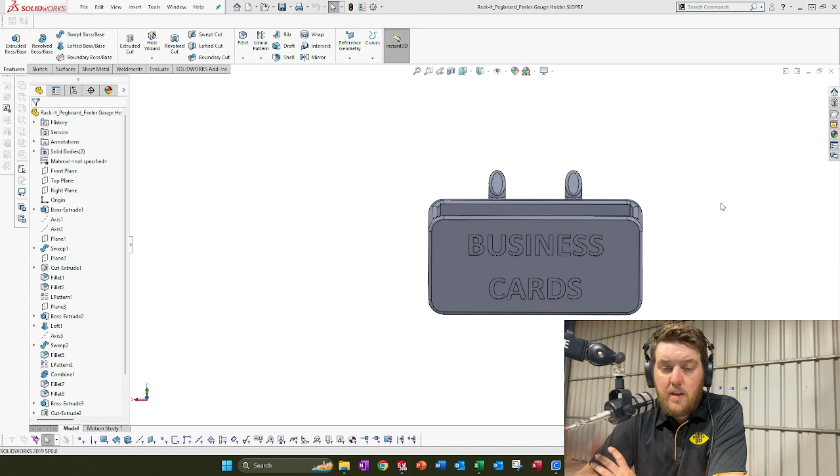And this is what we're going to look at doing tonight. This is one of the parts, designed for a scraper - I haven't got the scraper on me - but for a scraper to drop in here, and it's just got the hooks on the back. It's a pretty rough print. When I'm prototyping, I just try to print it quick and I don't clean it up much. Once it works and I'm happy that I'm going to use it, I'll print a finer copy of it. So that's what it looks like.

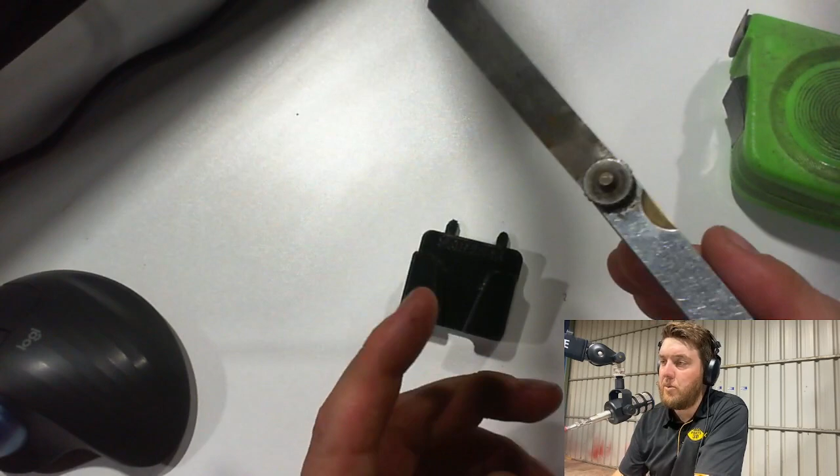And so I use a feeler gauge. Now, if you do use 3D printers, you'll know what this is for. People use paper sometimes to set their nozzle height, but I have found this 0.075 millimeter feeler gauge is perfect for 0.2, 0.4 and 0.6 mil nozzles, and that's worked really well. And of course it's firmer than paper, it won't tear, gives you a real firm contact with the nozzle and the bed. So yeah, I'd get some of those off eBay if I were you.

But I'm going to design one of these with a pocket to suit the feeler gauge so I can just go to it, grab it - it's on the board ready to go - rather than putting it in the shelf in a little drawer where it is now. I've got to keep fishing around to find it.

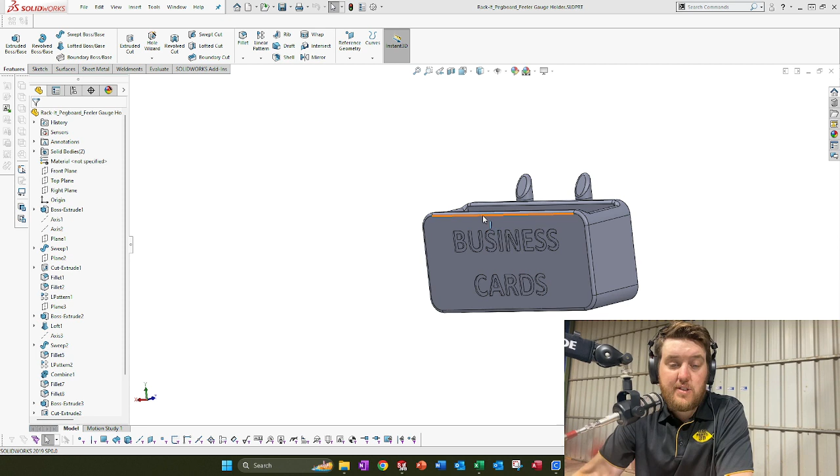Alright, so let's go to SolidWorks. This is my design software, and this is another one I've designed for my business cards, just to be held there, and if people come in I can give them one.

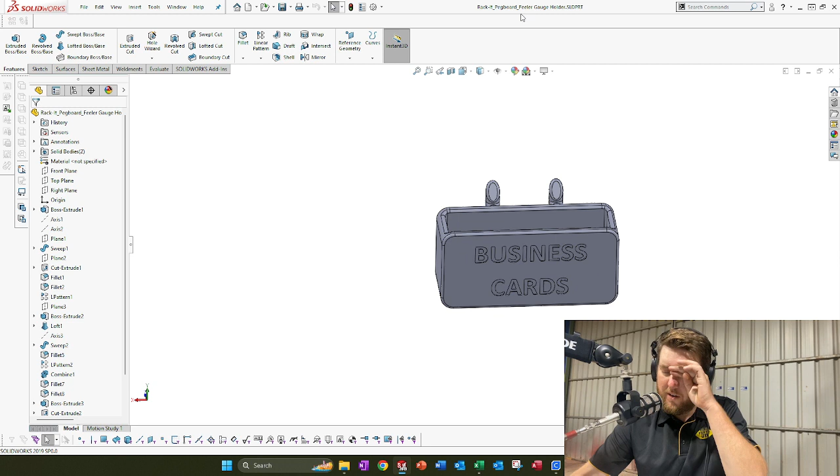So we'll use this. I've already saved a copy called feeler gauge holder. Now that's really important - if you're ever designing something, I encourage you, before you start designing, save a copy of the part you're doing, especially if you're copying over another part. I've sometimes gone up to an hour of drafting and either copied over another folder or lost it if the program crashes and I hadn't saved it.

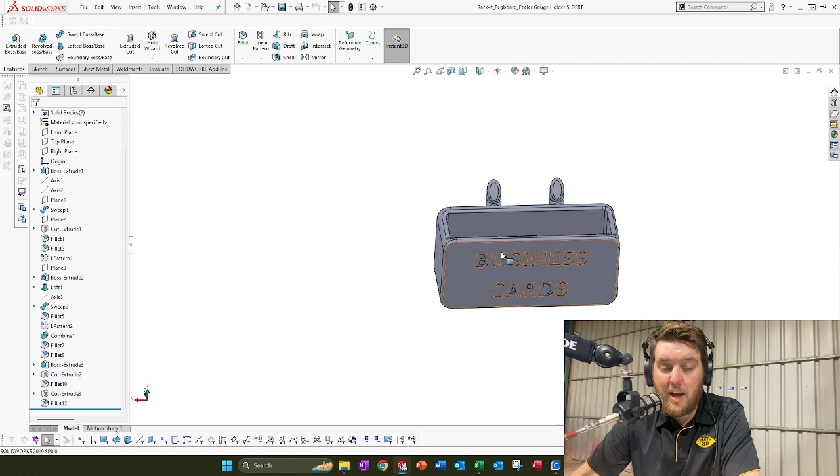Always start by saving it, and save regularly as you go. We're going to modify this. I'm not going to go too far, but this is not a ground-level-up tutorial on SolidWorks. It's just a rough idea of how I get a part designed, get measurements off the part, etc. I'm just taking the measurements already used for this business card holder and adjusting them.

Because in essence it's going to be the same thing - a pushed out section, a boxed out section with a pocket in it, which will suit the feeler gauge. So I'm not going to draw it from scratch. That's a good way when designing stuff, to have templates of parts saved, which takes away the time of ground level drafting.

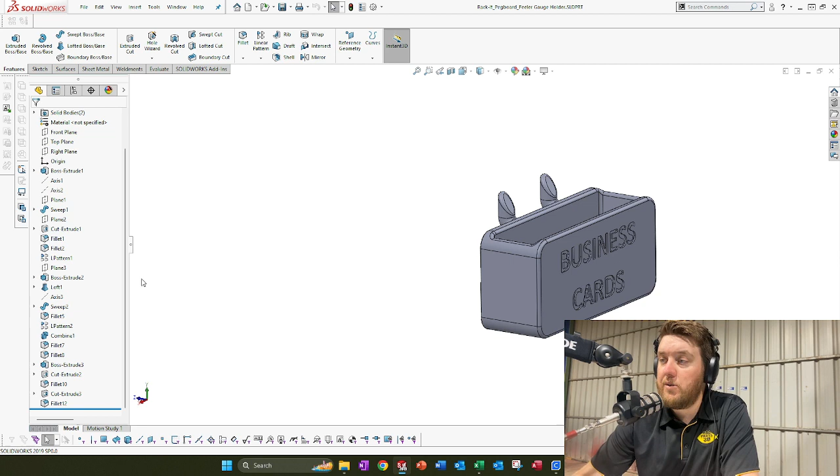But very quickly, if I scroll right back to the start, the first thing I did was draft the pegboard itself, to scale, every detail checked to make sure it's exactly right. That gives you a good foundation, as all the parts I draft are onto this template now. I won't go into too much detail on what I did there.

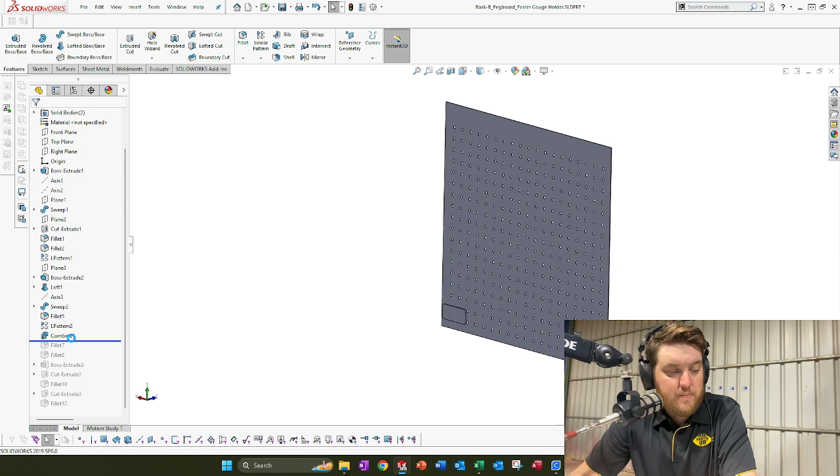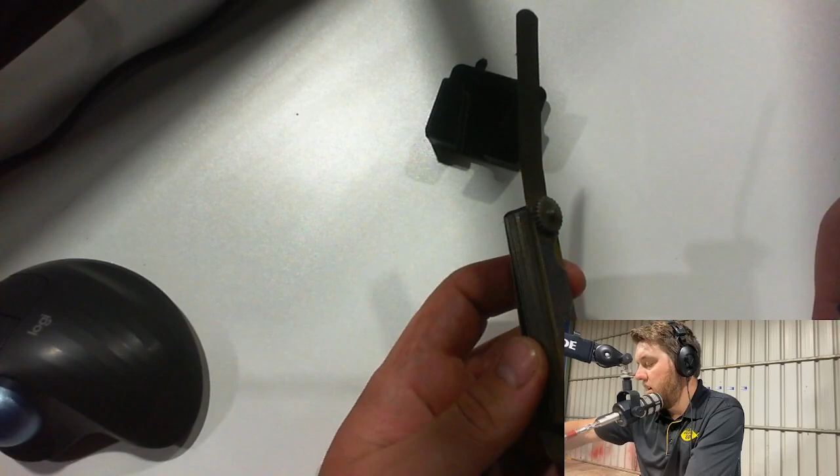Alright, that's where I want to be here. This is the backing plate template, so I've got to get this right. If we go back over to our part - it's not very wide, only 12 mil wide in terms of width, and I think it's going to suit this backing plate size anyway.

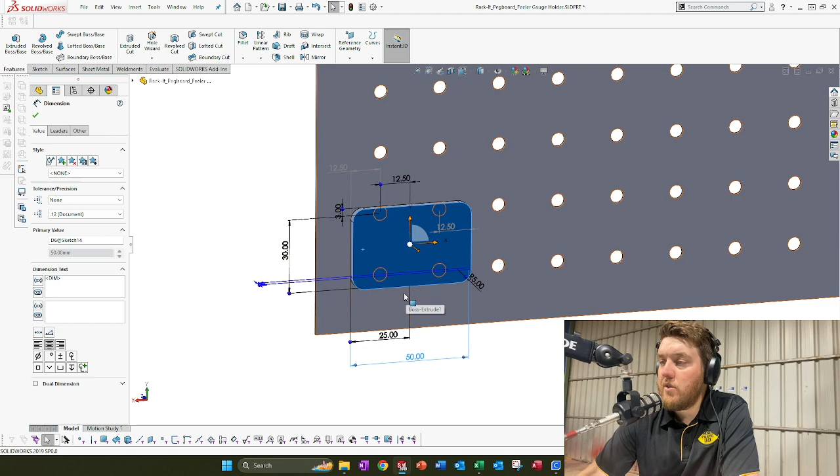So we'll copy that, the scraper one, which is 50 millimeters. Back to SolidWorks - this is 35, I'll do it off the center here. All I have to do is adjust this measurement to 25, and it'll make the overall width 50 millimeters, which we got there. That's good. And the height, I've got 30 mil there.

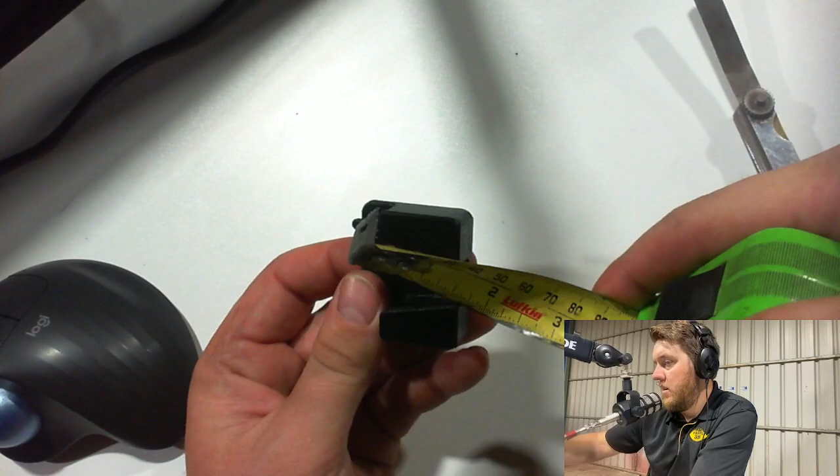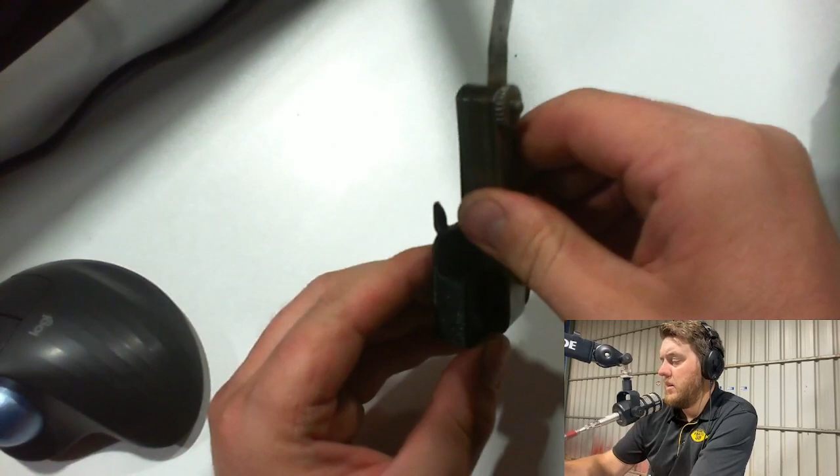I'm just going to check this scraper one. What's this scraper height? Because this height seems good. Yeah, it's a bit higher - can't really see that, 40 millimeters. Usually I'd have verniers, but they're in my truck. 40 mil. So I think it needs to be 30 mil, because this is quite high and quite heavy.

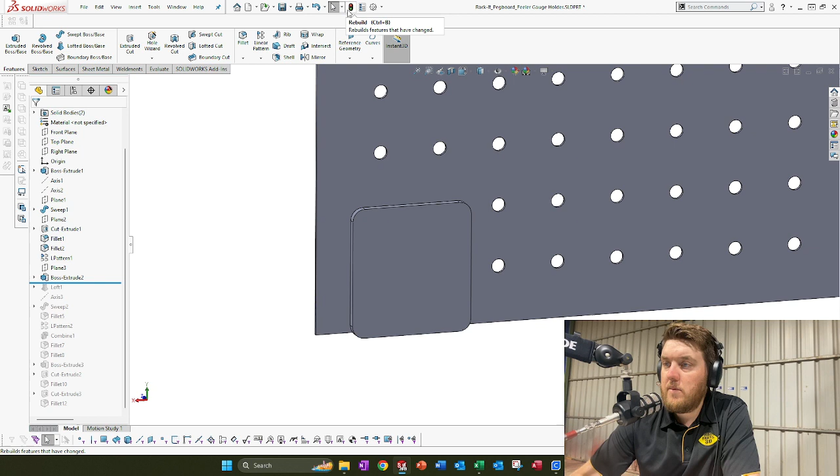You know what, I could probably go a bit deeper. Yep, I'll go even deeper again. I'm going to go 50 mil deep on the overall height of the backing plate so it supports it and doesn't fall out or anything. So we'll go back across and change this vertical height to 50 mil, and we'll just press rebuild. Yeah, that looks good. Alright, now we'll go down.

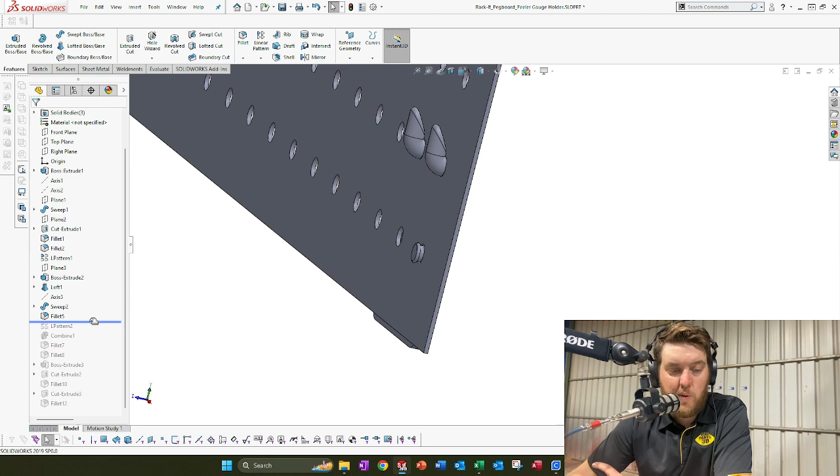The next step, this is called rolling back. So all these features under here are already designed, but I've just rolled them back to edit the features behind them. As I roll it forward, each of those features will jump in. This is where I designed the hooks and the little plugs in the bottom.

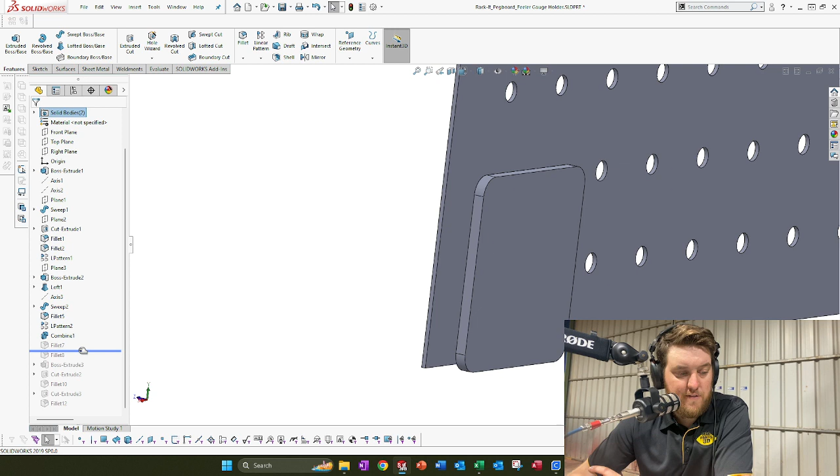I won't go into detail about them, it's my special secret. It took me hours to get the size of these little plugs just right so they'd push through the hole without breaking, but still provide pressure and hold the thing in place firmly when it's there. But anyway, let's keep moving.

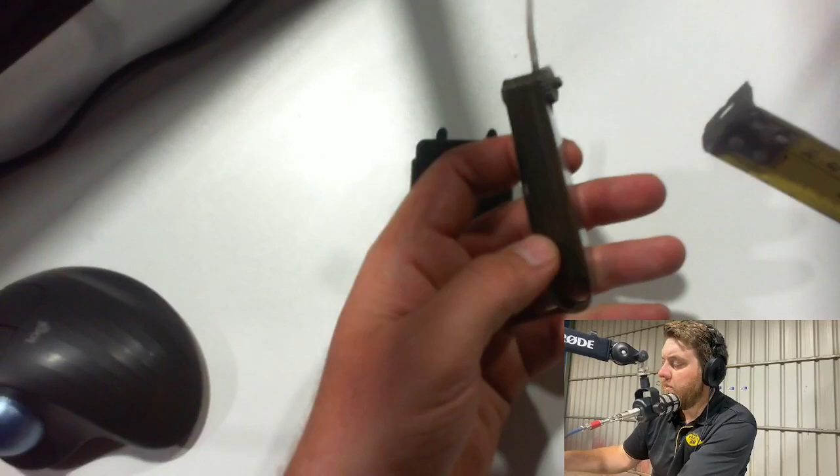Cool, so that's a combine - I combined all those parts together, and now with a few fillets put on, we're ready to start building off the backing plate. Alright, we need a depth. At the moment I've got 20 mil deep - I've taken that face and brought it out 20 mil for my business cards, but let's have a look what I need for this feeler gauge.

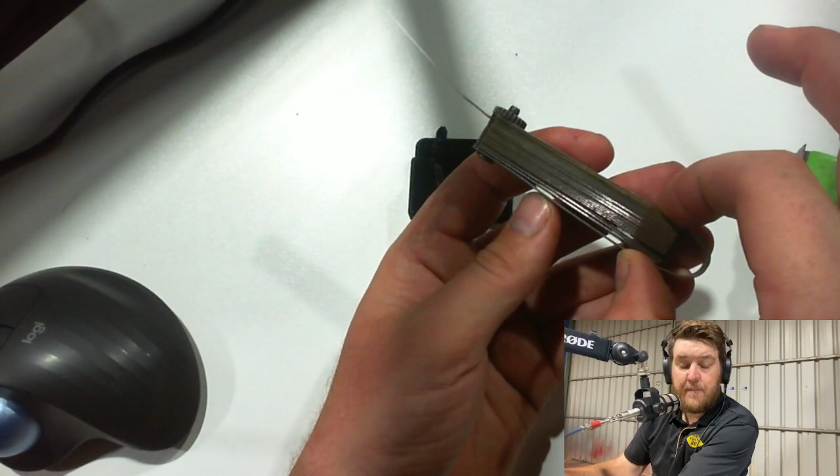The feeler gauge is about 20 mil, that pushes in, but I don't want it to be too tight - I want it to be loose. So 20 mil looks good for the pocket depth, and then you need to add how much thickness of material you want in front to retain it, which I think 3 mil will be fine. And I encourage you, if you are designing parts to be 3D printed, try and do your design, get it working, and then think.

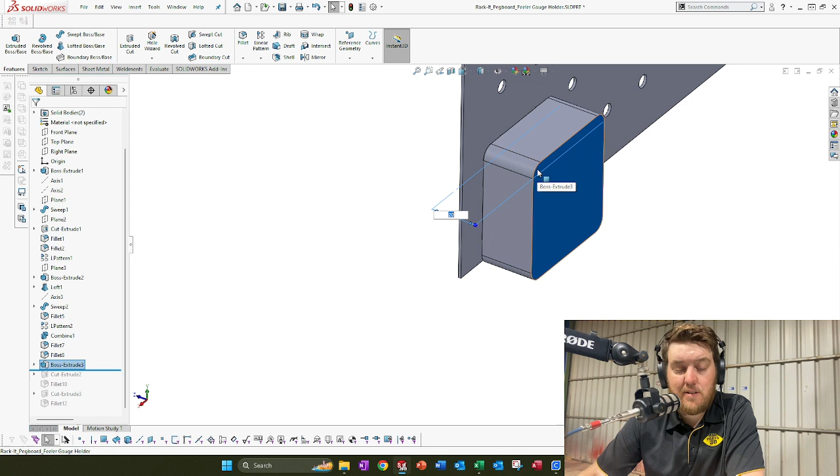I learned this from Elon Musk. I think he calls it delete, delete, delete. Try to remove as much material as you don't need. You don't want it to be weak. You still want it to be strong and useful, but you only want to use the material you need, because every bit of material you lay in costs money.

So I'm going to make it 20, which is for the depth of the feeler gauge, plus 3. And that's a good thing about SolidWorks as well, you can just put in your formulas, 20 plus 3. If you've got stuff that's a bit more complicated than that, obviously. 23 mil deep. Now we're going to roll back the next feature, which is the pocket.

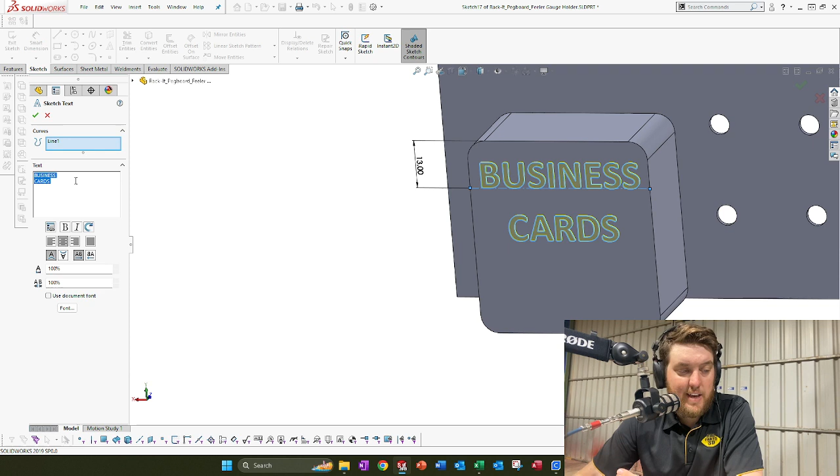Oh no, the text on the front. All right, we've got to edit that. So we right click, edit that sketch, double click on the text, and we'll put in feeler, enter, gauge, tick, and we'll just see what it looks like.

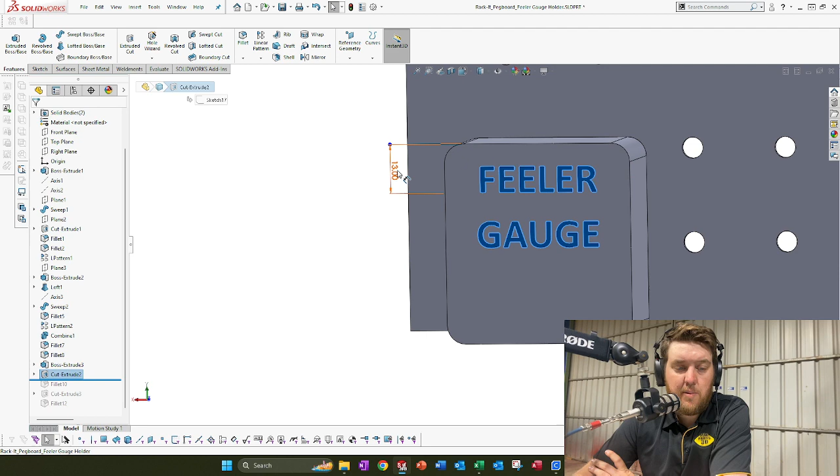And it's a bit high, so I'll just have to go into the sketch. I can preview it, and I've got 13 mil, excuse me, which is to the top line where the text starts on. So I'm going to bring that down, probably another 10 mil, 23. Yeah, that looks better. You could take the time and get it precise, but that looks good enough for me. All right, so that's good.

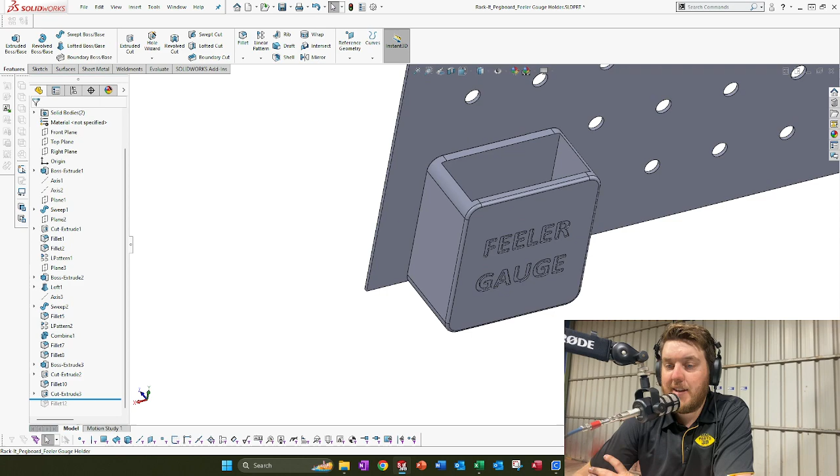Let's roll back the next feature, a fillet. Oh yep, just a fillet on the front. We'll leave that the same. Next feature, the pocket. All right.

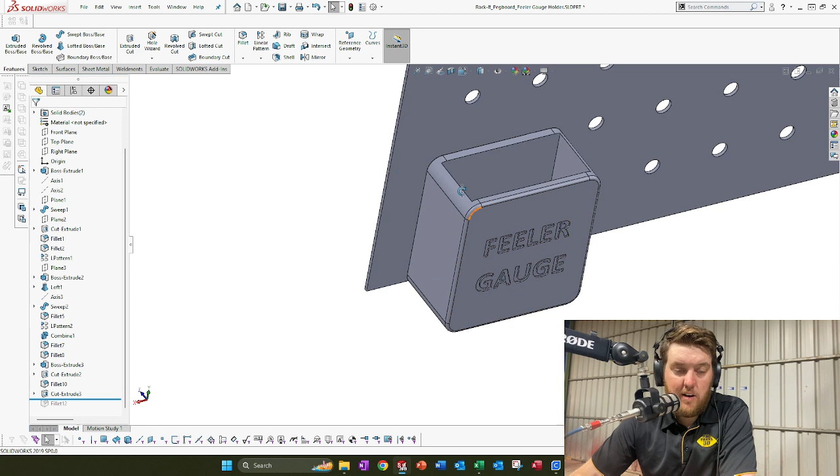Now that's too wide. We'll go back to our feeler gauge and figure out the width of the pocket that we need to machine, which is this dimension here. And that's right, it's 13 mil. It looks like it's about, my tape is old, next time I'll get verniers. It looks like 13 mil, so I'll make it, I don't want it too sloppy, I'll make it 16. Give 3 mil clearance in there just to be safe.

So we'll come back across. Again, I like that in SolidWorks you can just click on the feature in the design area and it brings up dimensions which you can edit, or of course you can right click on the feature tree, edit sketch, and then you get your sketch there.

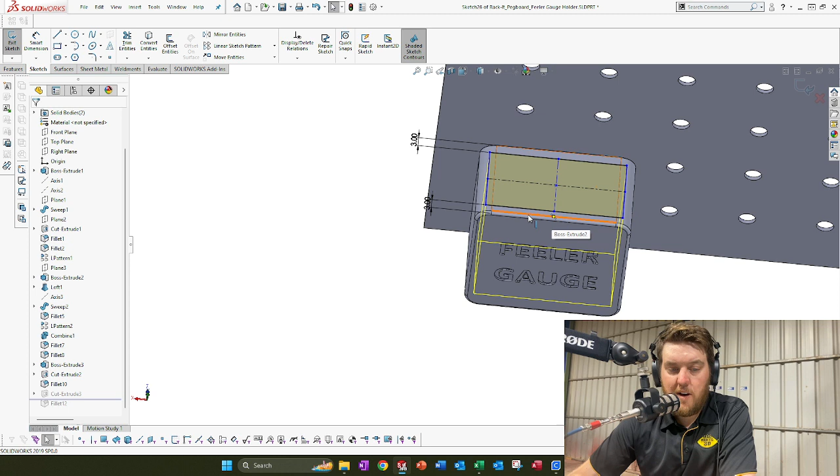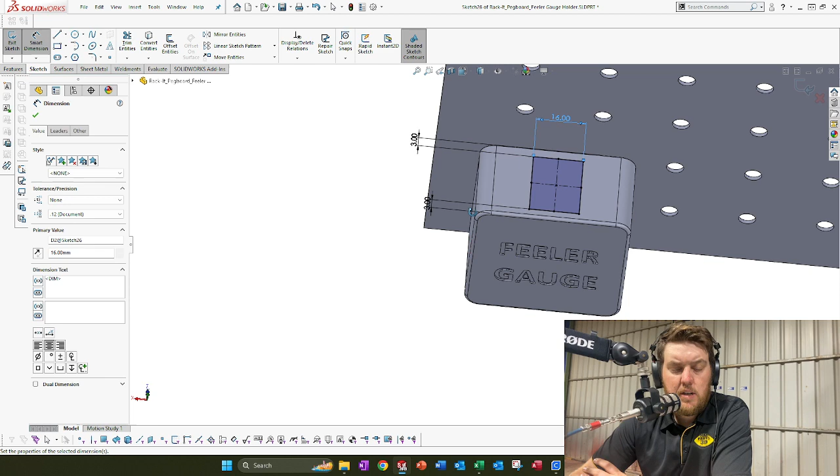So I'm going to not go off the edges this time, delete those measurements, delete, delete. I'm going to right click on this line here, find the midpoint, and lock the center of my pocket cutout to that midpoint. Boom. And now when I dimension this width, it'll add or reduce it equally on both sides.

I can't even remember what, 16 mil, so I put that in there. 16 millimeters, bring it equally on both sides. 3 mil from the front and 3 mil from the back. I think that's right. Exit.

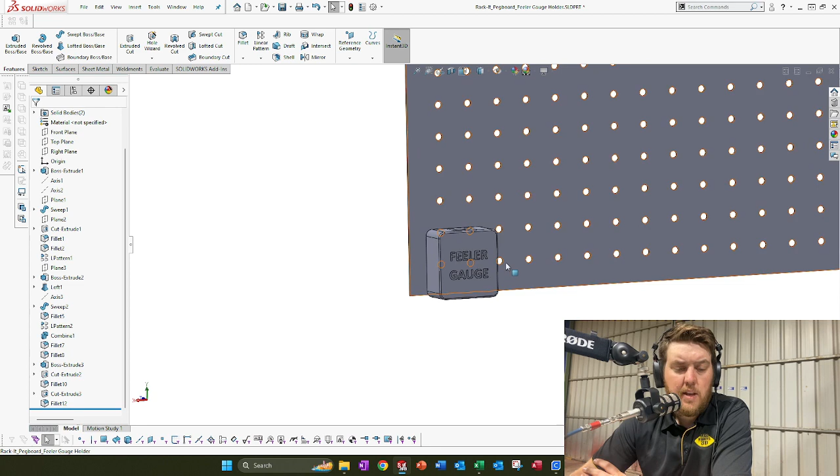That looks pretty good. I'll roll this next feature back, some fillets. Yep, and that's good. Fillets all the inside, I think 1 or 2 mil. And that's looking like it's pretty much ready to go.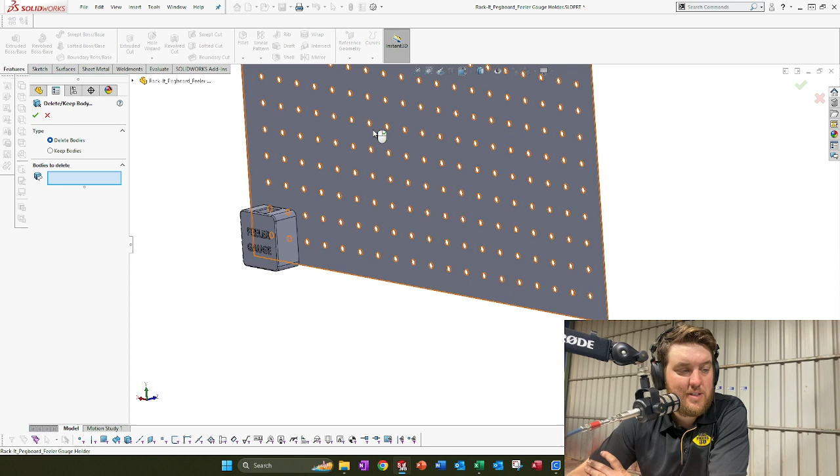Now what I do is I hide this, get rid of that because I don't want that to be 3D printed. I just want to be left here with the part that I'm going to be 3D printing. And what I might actually do, I know it probably doesn't come through, but I'm just going to delete that body. So insert feature, because I don't need that anymore. Delete body, bodies to delete, that one. Boom. And I'm just left with the part that I need.

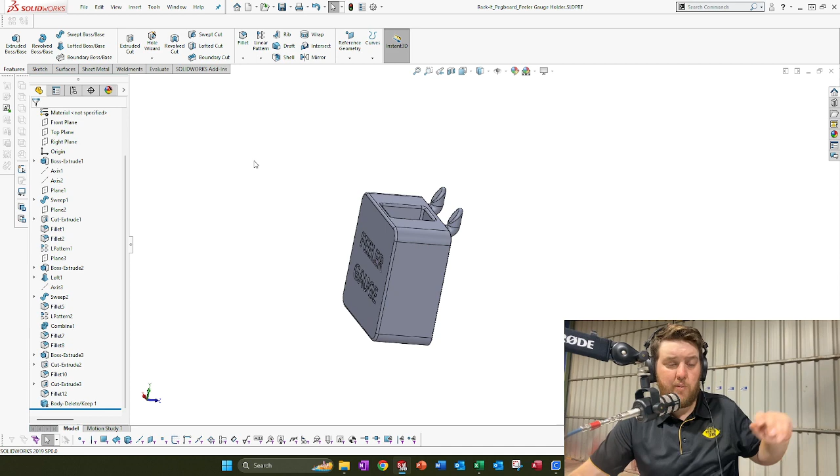Now it's probably, I could probably go a bit narrower if I wanted and right on these hooks, but just, I don't know, it looks good. The text fits on there nicely, so I'm going to keep it that width.

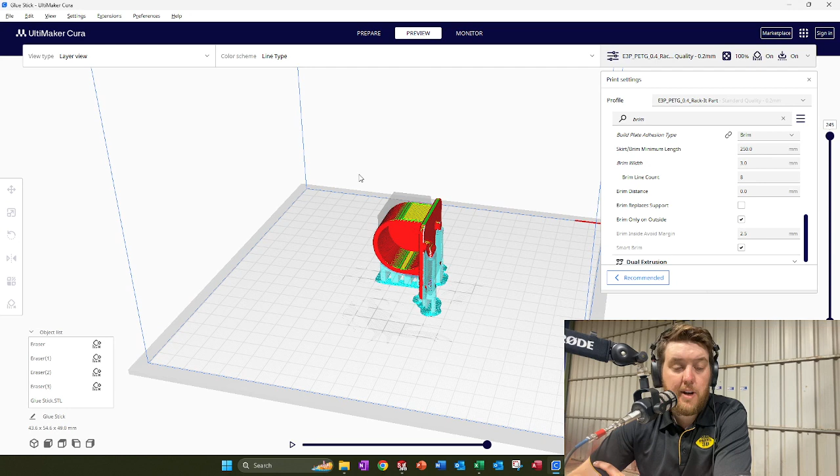All right, let's save it as an STL. So this at the moment is a SolidWorks part to be read in SolidWorks and some other programs, but it won't be read by the 3D printing software. So you go File, Save As, STL, which is what the 3D print software will read. Save. It'll ask me a question. Yes.

All right, for now I can close that down. I'll leave that. I'll open up, this is my slicer software.

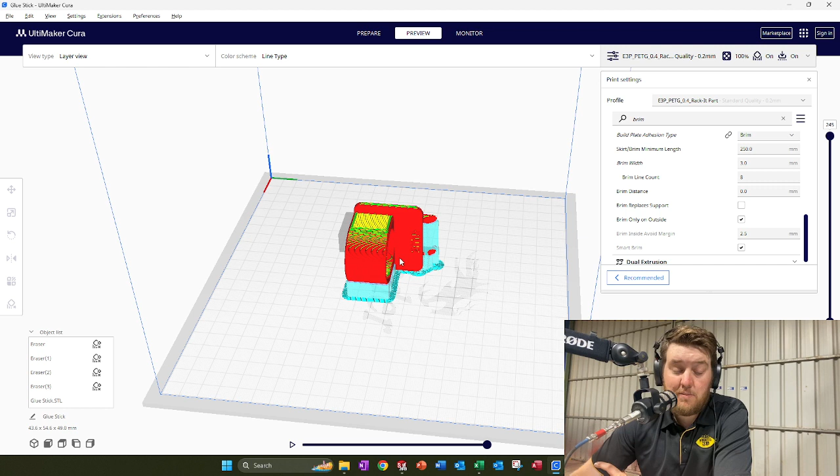There's plenty of tutorials about how to use the nitty-gritty of slicers on the web, so I'm not going to explain that. I just wanted to show you how to CAD. I'll hopefully show you in the future how to design more custom parts. I don't use a 3D scanner, I just use measuring tooling, and you can get pretty good results just with that.

All right, so we're going to clear the build plate. Go to prepare, open, find my part, which was in downloads for now. There it is, Rack-It feeler gauge. That's the one.

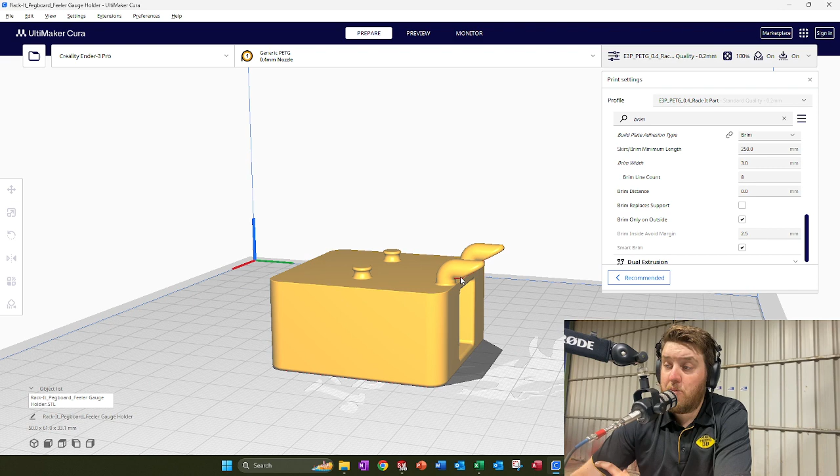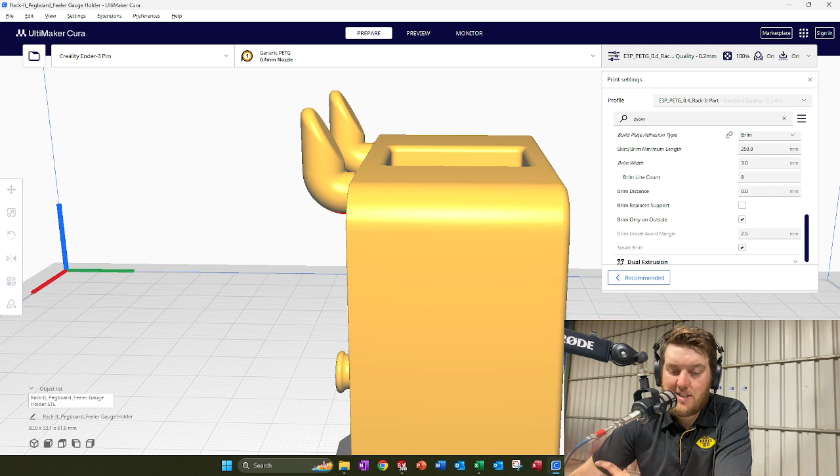Now, when I'm printing stuff like this, obviously the weak point is these little hooks. If you push them in and put a little bit of pressure on them, they're just going to snap off. If I printed it in this orientation, the layers would print in this direction. Let me do a slice and show you the preview. It's going to print in this direction, and at this point the layer's only going to go from there to there. It's going to be very weak and most likely snap off very easily. So if you come down, that's where it's going to be printing a layer like that, and that'll snap off a piece of cake.

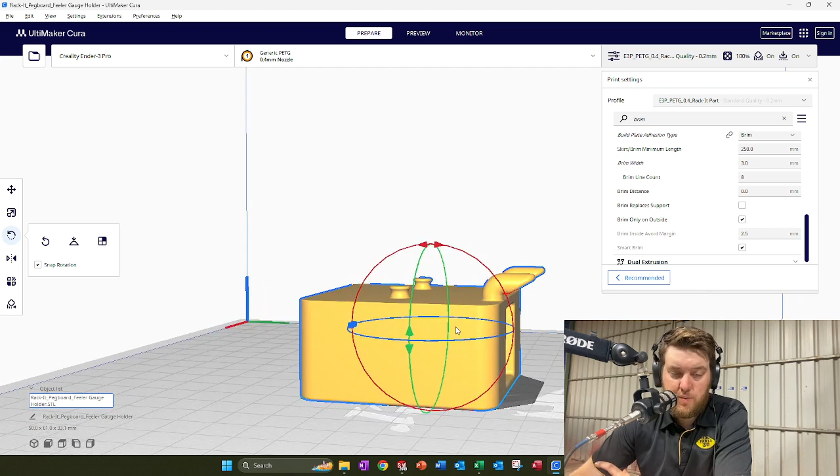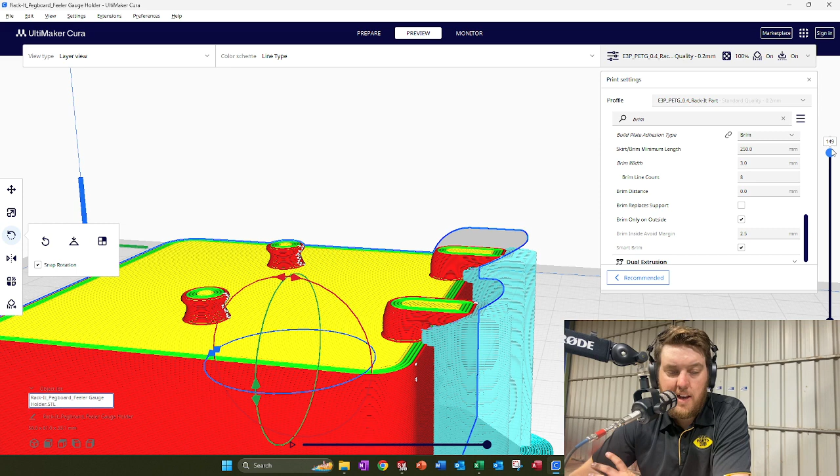So what we'll do instead is go back to prepare. We're going to orientate it, well we can do one of two ways. We can do it that direction, so when the layers go down they'll now go in the opposite direction, which will support it when it's installed into the board. When you pull against it, that layer is now stretched over the weakest point and will be a lot stronger. That's one direction you could do it in, or we could do it this way.

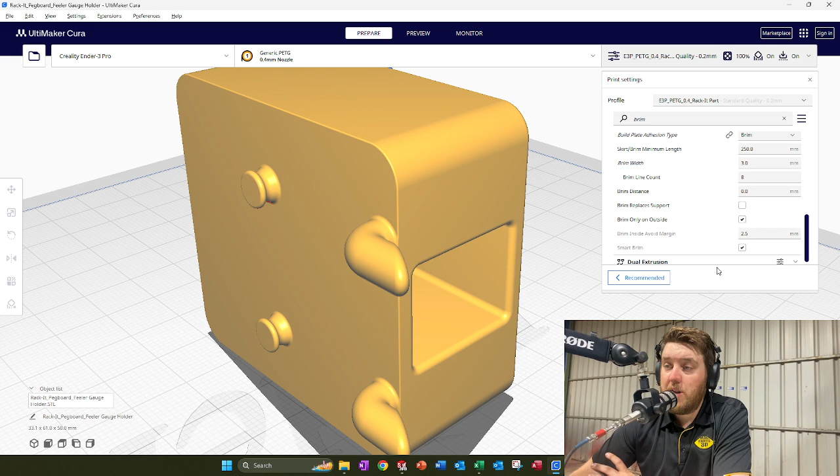Same thing - so when it prints, the layers will come from the body out through the little part and back through the body. Let's have a look, let's just slice it. So when you're doing parts where you want strength, you really have to think about the way the layers go and whether it'll work with how the part is going to be used.

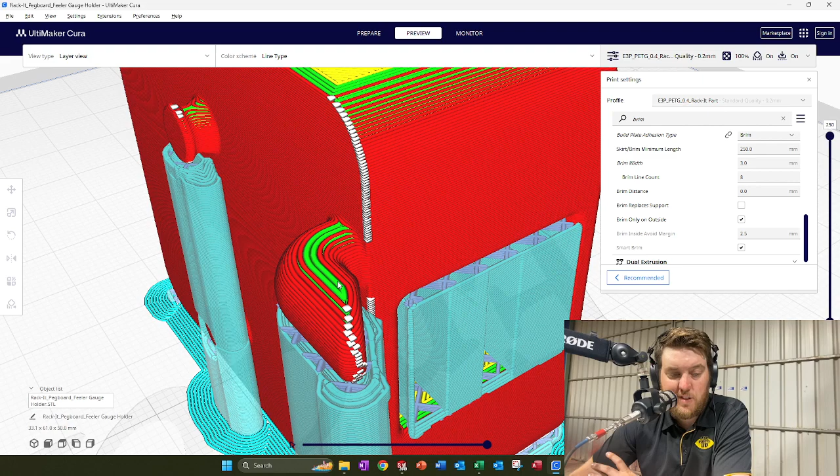So have a look at a preview of this. You can see the layers come from out of the main body into the little weaker part and then back into the main body, creating a really strong join. So when you apply pressure here, maybe when you're trying to get it back out or put it in, it's not going to just snap through this small round section - that's all tied back into the main body now.

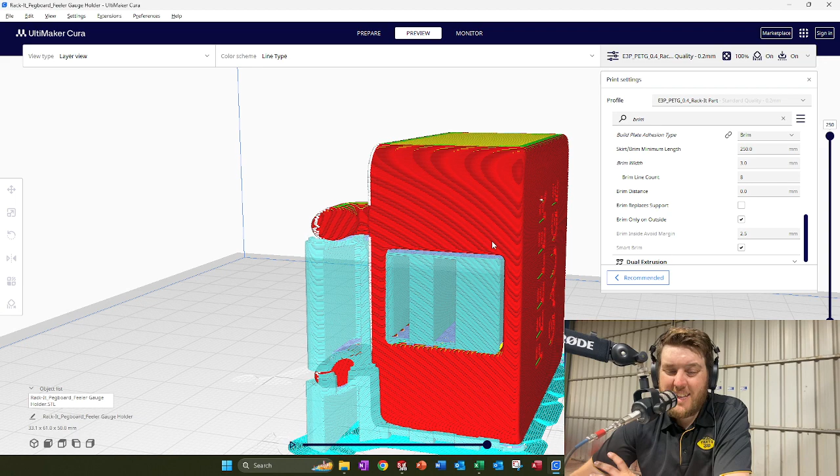So that's really useful. It took me a little while to figure that out, just to get my mindset thinking about which way my layers go. Now obviously putting it this way means we're going to have the full pocket filled with support, but that's just unavoidable - we'll pluck all that out and give it a little scrape and clean up. That's why I made it a little bit bigger, so if the dimensions are a bit smaller, it's not going to be tight on the feeler gauge.

I think I'll go in that direction purely because if I went the other way, it's got a lot more distance for the support to build to uphold these little bits.

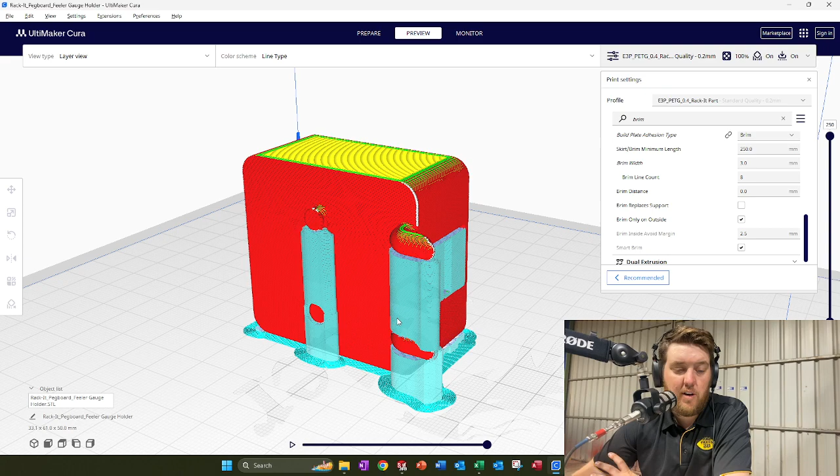I use a little bit of brim, just, I don't know - I'm just a sook. All my prints, I'm in a shed here, I just set them and forget them, I don't monitor them. So I generally put a small brim on there to keep things tight. I watch the first couple of perimeters go down, and if they're looking nice and flat and fat, then I just let it go.

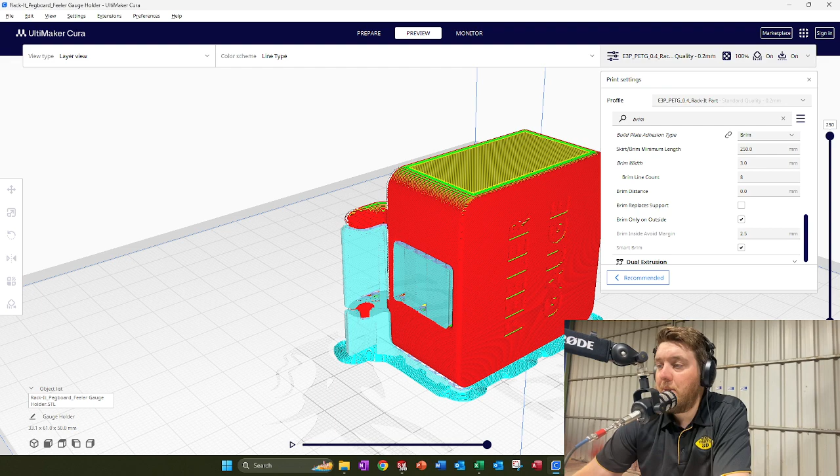Feeler gauge, yeah, we're ready to go. All right, so I am going to just make the title a bit shorter because sometimes that can be a pain - feeler gauge holder. Well, I'm literally going to save it to a mini micro USB now, take it over to the printer. I'll print it out tomorrow morning or tomorrow night. I'll show you the part, and if it works, then we might design another part.